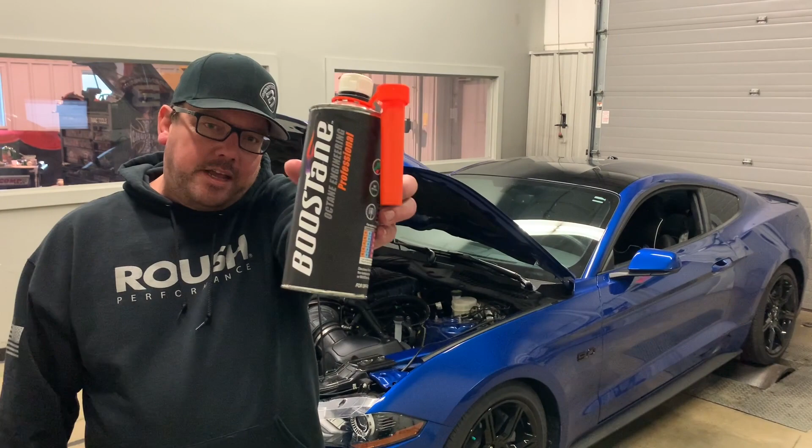We have an 18 GT Whipple supercharged automatic. I'm going to talk about BOOSTane, and how you get 100 octane—I read a lot on the internet about that, so we're going to discuss it. We're going to talk about tire spin on the dyno and the upgrades we did to this 18 to get over 700 at the tires. When it was here a year ago, we were about 630 at the tires. So let's check out how we got there.

All right, we're gonna go down and take a look at the engine compartment. I have Doug with me, and I'm gonna tell you what we did this time around. Don't worry, at the end of this video I'll put a link to the video I did about a year ago when I was making 630 at the tires, so you can watch that. But here's what we have going today. I'll bring you up to date on what was on the car before. When it came in last time: Stage 2 Whipple kit, 93 octane, straight up Stage 2 kit. We did a bigger radiator and oil pump gears. That was it at the time.

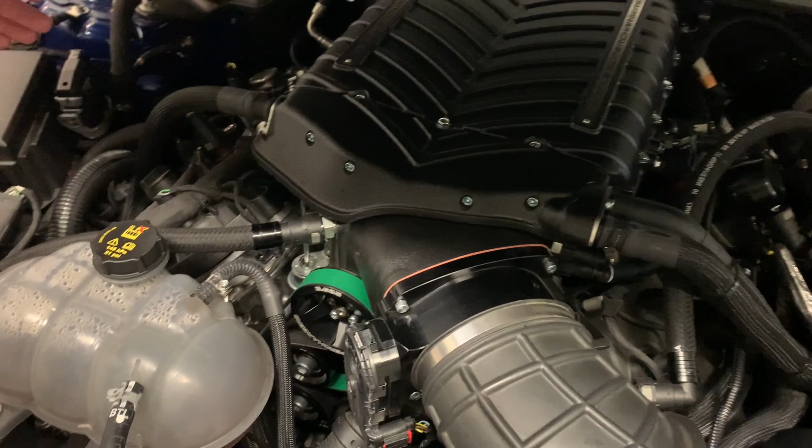Doug, come down, take a look. So Gen 5 Whipple, you get the big 132 throttle body. It does come with bigger injectors on the Stage 2 kit, but we installed DW95 fuel injectors this time around. We dropped from the 3.7 pulley down to a 3.625, so we're gonna get about another roughly pound of boost. We installed a set of Kooks headers. Before, we did the radiator—I'm a big fan of cooling mods—but at the time you couldn't get a rear cylinder head cooling kit, which we did install this time around. It's by MMR, I'll put a link in the description so you can read about that and everything else we're talking about.

So what we have: automatic, 100 octane mixed, the Gen 5 Whipple 132 throttle body, 95 pound fuel injectors, the fuel pump that comes in the Whipple kit, and Kooks headers. That's it right there. Let's check out a dyno pull and talk a little bit more about it.

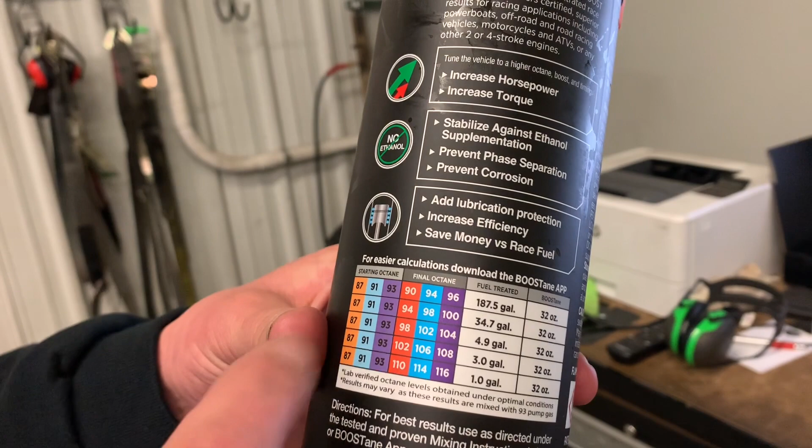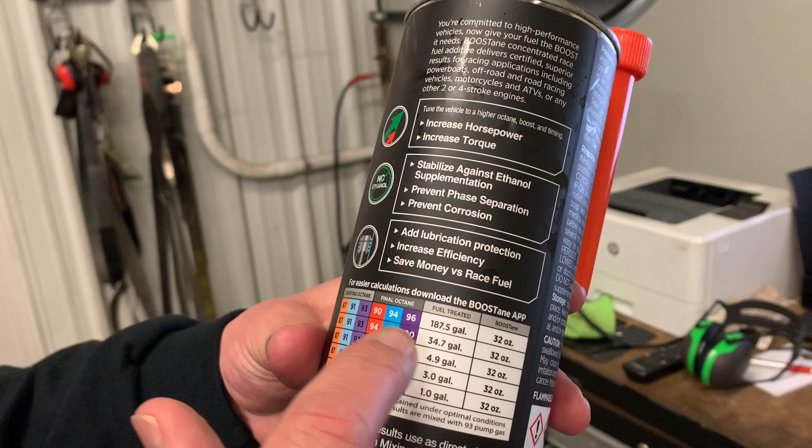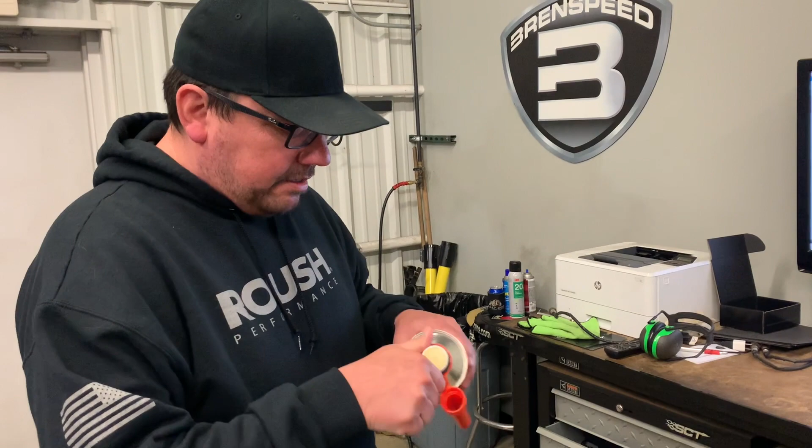We're running 93 as a starting point. The chart is very simple—we want to be over 100. It says if you want 104, mix one of these cans with 5 gallons of fuel, you'll get 104. You can mix one can in with 35 gallons and get 100. So really, if you fill your tank up and put a whole can in, you're gonna be over 100, under 104. That's an easy way to do it. It's pretty sweet—you take the lid off these things, and it comes with this right there. Just screw that on, it'll pour right into your tank, won't leak out, won't go on the side of your car. That works out awesome.

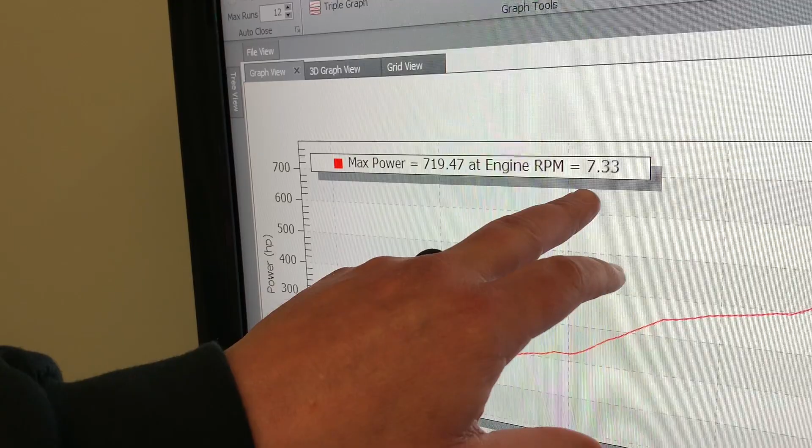But here's what we have: DynoJet SAE. Doug, come take a look. 719 real horsepower at 7,300 RPM, automatic. Torque, awesome, 593, peaking at 5,500.

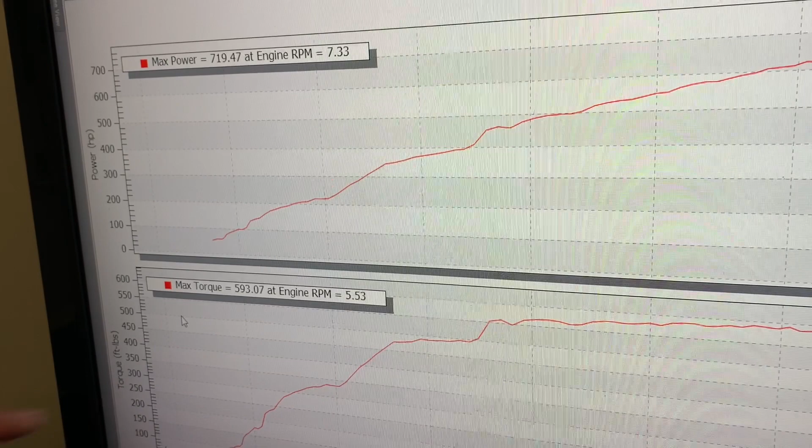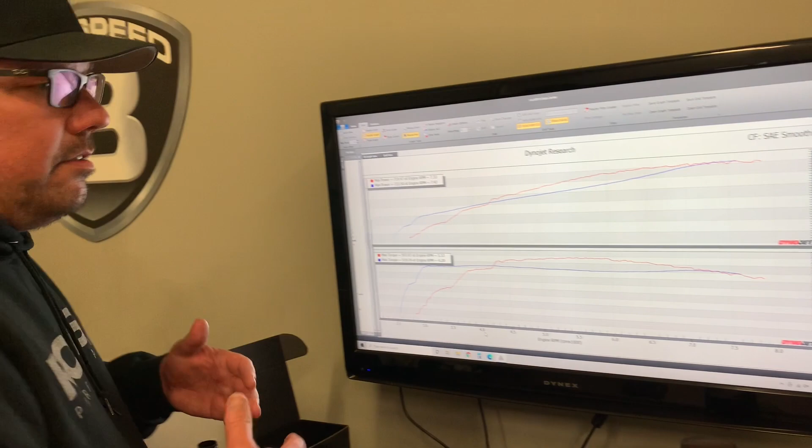Now let me explain what's going on right here. Why does that look like that? All right Doug, let me in here real quick. I'm gonna bring up a graph of when we were getting into the throttle earlier and it was spinning, so you can understand what those graphs look like. So here's what we got: when you just stab it on the dyno, come over here—722 real horse, fine.

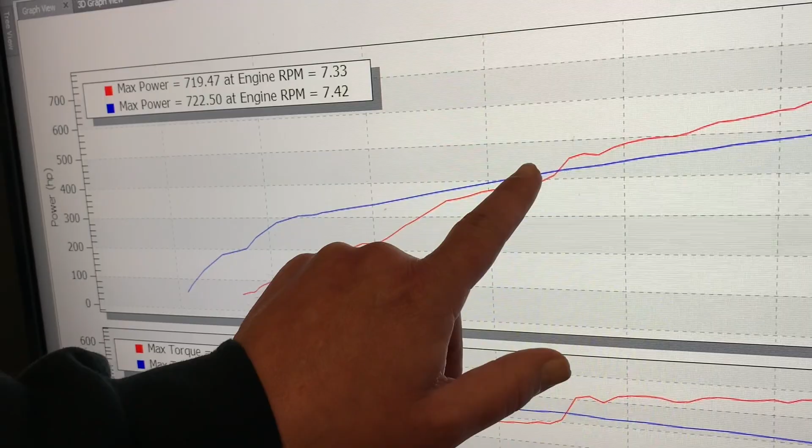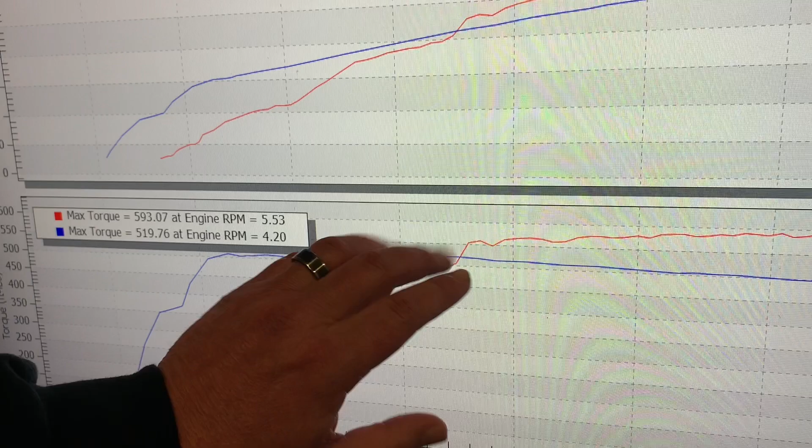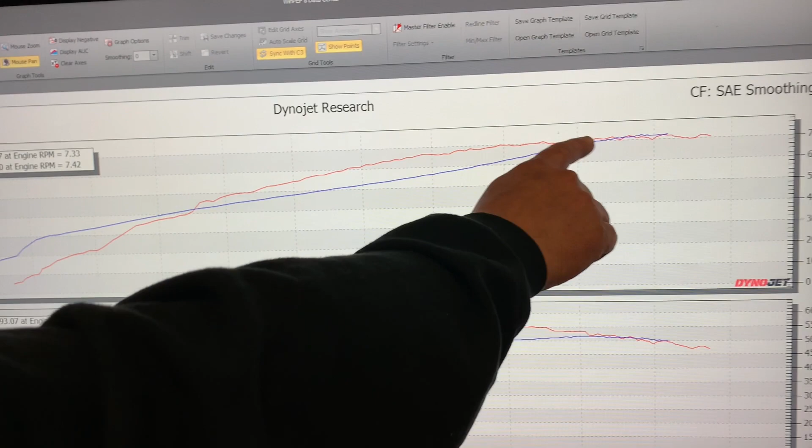Torque 520—now the blue line is spinning, all right? See, we're higher here, but that's because we laid into the throttle so slow on the last pull to keep it from spinning. Look at torque, all right—it looks higher, but that's wide open, spinning. This is getting into the throttle really slow. Now if you back away a little bit and look at the two graphs—exact same tune, just two pulls apart basically—the blue line is so much lower and it's kind of drooped down right here. Sometimes it's more drastic, sometimes it'll come like that. That's what it looks like if it's spinning, but once you actually get traction on the dyno, your number is of course up here more, where you want it.

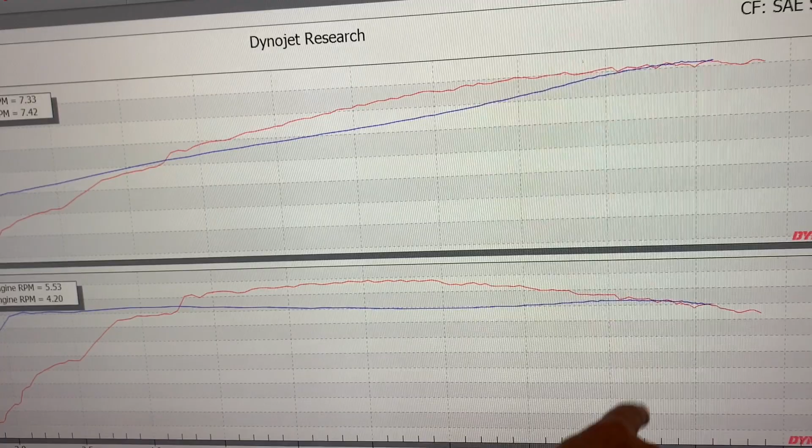Torque, same way—droops down right here instead of climbing. This time it climbs, okay, we have traction. It wasn't grabbing when it was spinning all the way to almost 7,000—that's when the graphs start overlaying each other. So that's kind of something to look at when you see it spinning. If you have a manual transmission car, you'll see that also if your clutch is slipping.

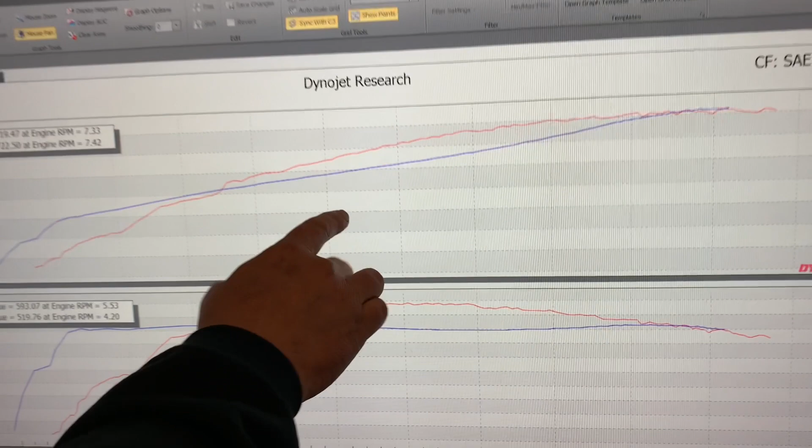So I just want to take a second to show you a couple things. One: 720 at the tires, 590 torque, automatic. This car is going to be stupid on the street, super fast at the track. Then, 100 octane—don't go to AutoZone and buy something generic, use something like BOOSTane. That's a really good way to get some quality octane in the tank, and you can just pour it right in. What I do is pour it in and then fill my tank up and I'm good to go. Or you can mix it—use a fuel jug, whatever you want to do.

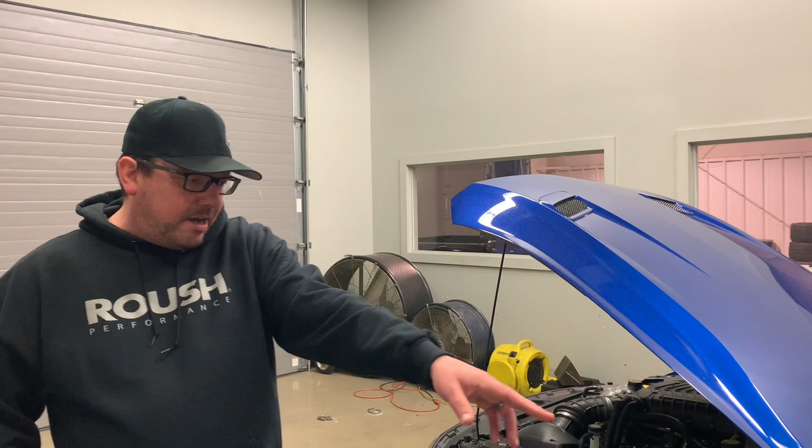One more look right here at this 18. Nice, clean looking car—you'd have no idea from looking at the outside of it. This thing is 720 at the tires basically, that much torque. Looking at the tires on the back of this car right here, from what's seen on the dyno, it's time for some super sticky ones.